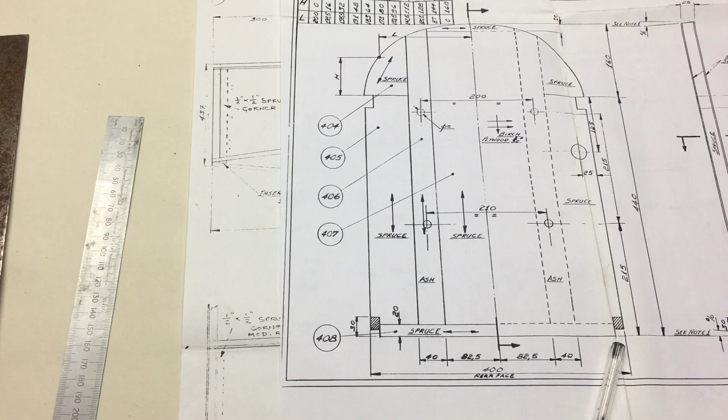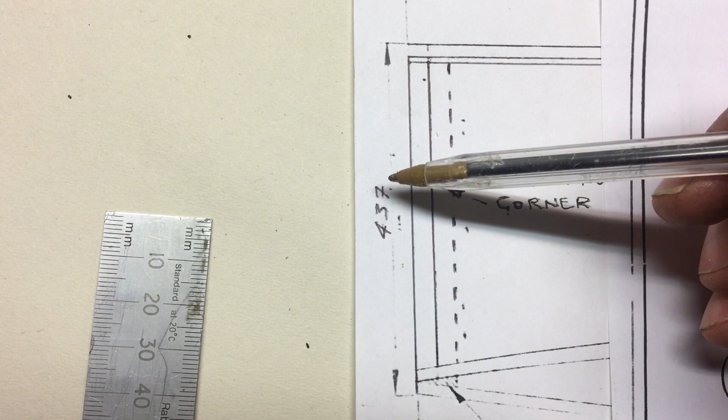I'm just keen to capture this. I had to do a bit of inference here to try and make sense of the plans because of fading, which may or may not be due to poor reproduction or me not keeping the plans well. The number I was having a problem with was barely legible, although it looked like 437.

This is the point where the top of the longeron, it's the depth between the top of the top longeron and the bottom of the bottom longeron. So let's assume that number wasn't actually available.

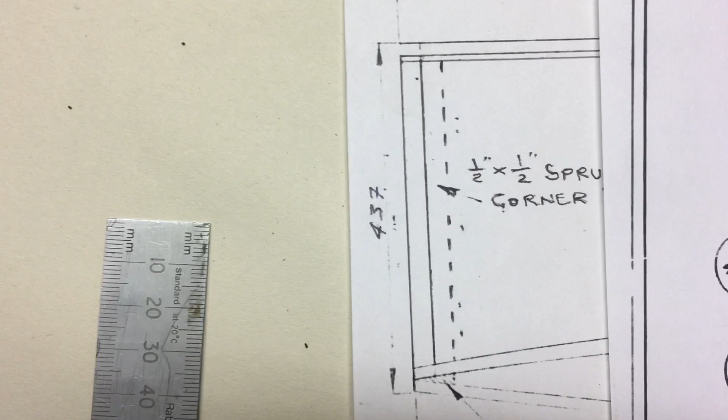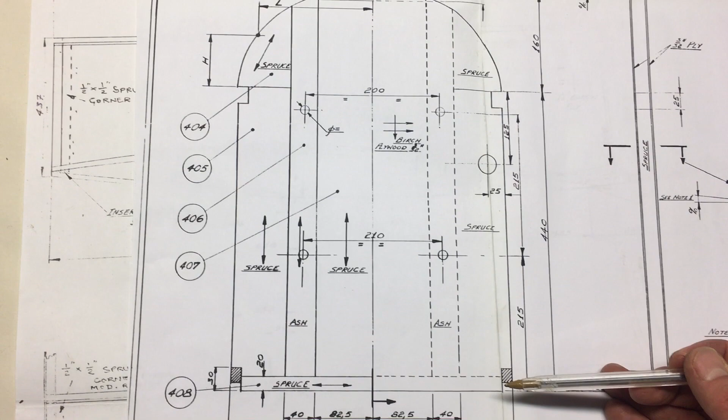That block there is basically the firewall behind the engine, which is this part here. The top of the top longeron sits in there, and the bottom of the bottom longeron sits there, and the distance between them is, according to this, 440 mil.

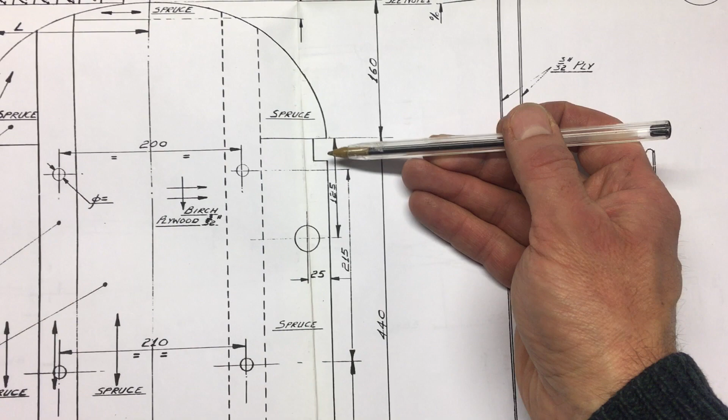If you look from the side at the top, you've got 25, because this is made up of a 15 by 15 plus a 10, plus 15 by 15 plus a 10 by 15 - 25, and that corresponds to what's cut into the bulkhead I have.

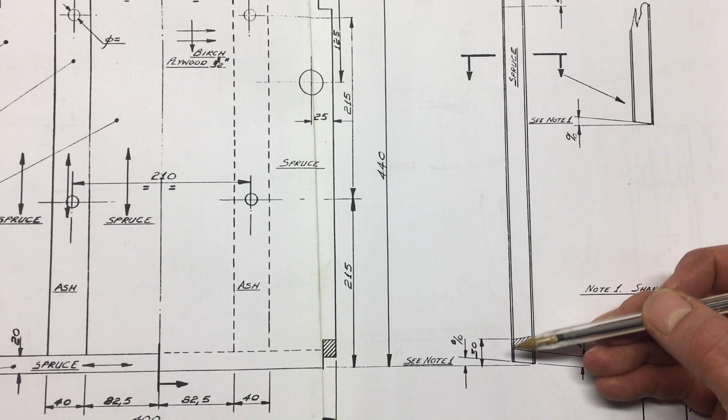Now if you come down to the bottom, so 440, where do you get your 437 from? What you can see is the 440 comes to the bottom of the firewall there, but because the bottom longeron is kind of climbing up towards the firewall, there is a subtle shortening of this length.

And that is the 3 mil, I think, that gets you to what I think is 437 millimeters for the front there.

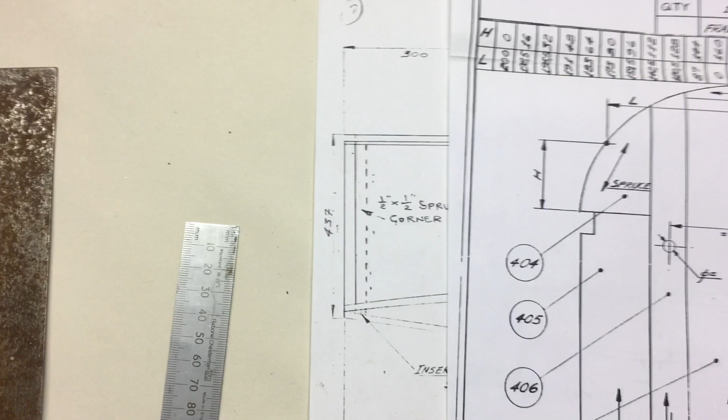And I suppose there's a really straightforward way of working out what that really needs to be. Let me just get past the assorted junk - this isn't junk, this is nicely made stuff, not by me.

Here is the firewall. So let's have a look at it. So there we are, that's what I'm talking about. Sorry for the finger in the way.

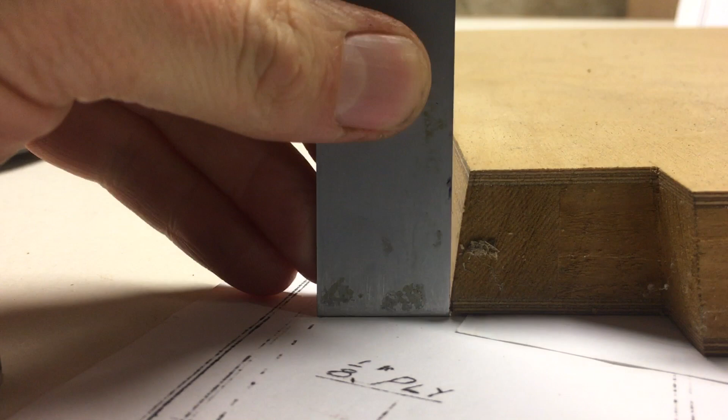That's the difference. Now, is that 3 millimeters? Let's have a look. Is that 3 millimeters? I think it is.

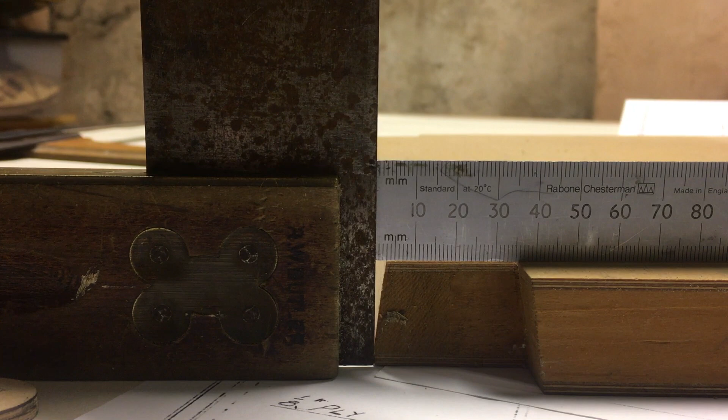There we go, you can see daylight and then it disappears - 3 millimeters. And down the bottom there, it's butted up nicely.

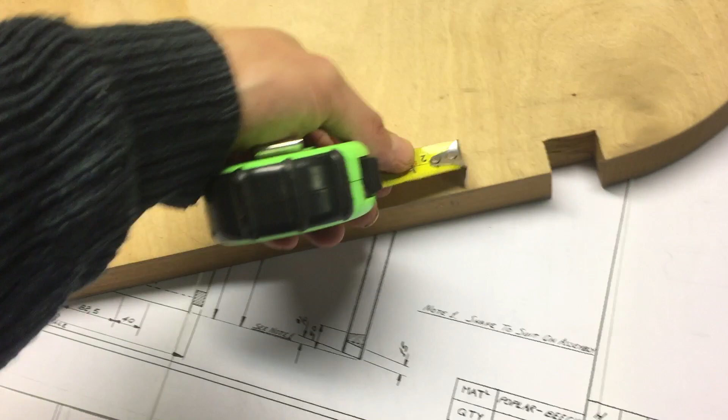Wow, that's helpful. Right, let's just double check that, if Malcolm, who sold me this kit - I can probably say his first name without destroying his privacy - got it right, which I'm sure he did.

We should be looking, so I'm going to do this - if I stick my tape up against the top there, what have we got there? Well, as near as damn it, I reckon 437 millimeters if I position my...

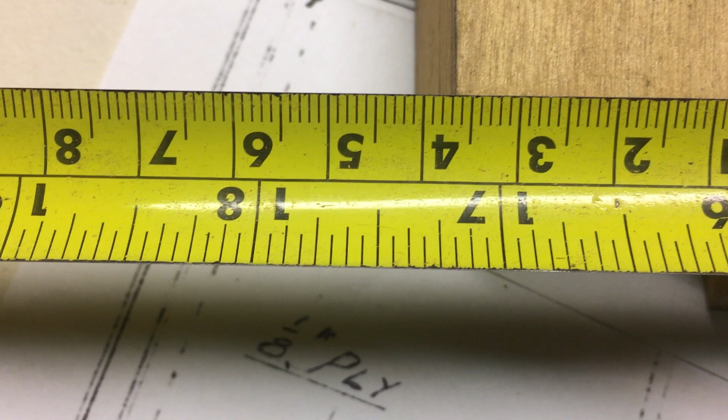Towards the bottom, that's where - where am I? There, okay, so that's 436, but if one was being imaginative, I think you could say that was 437 if I put it down against there. Okay, so 437 it is.

I'm going with that. Fine, brilliant. That means I can actually crack on with laying this out, continue to lay this out.

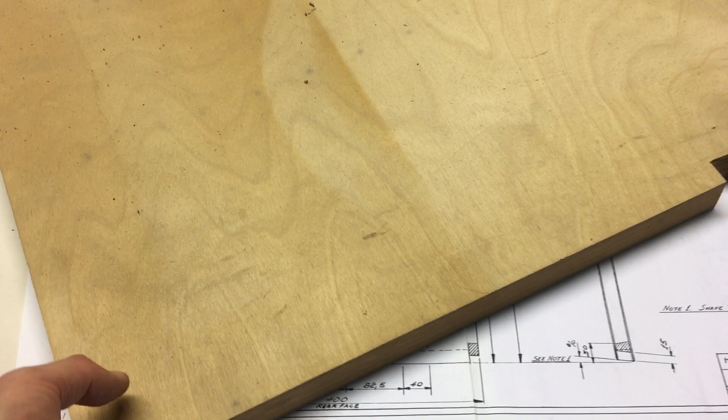It was a problem because I just couldn't - I couldn't - if I can gesticulate in front of the camera, give a bit of emphasis - I couldn't continue to work my way along the fuselage.

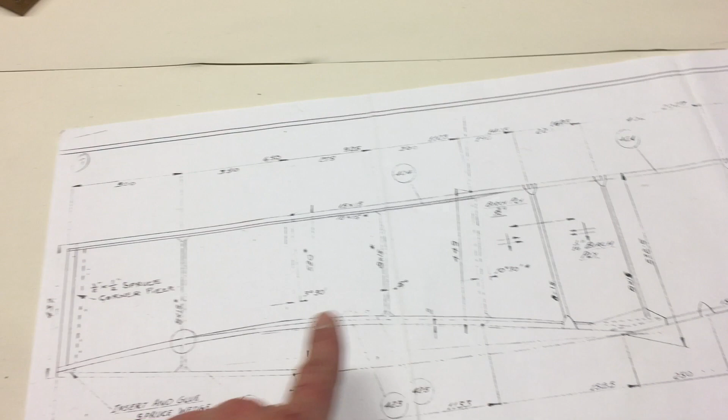If I couldn't pin that number down, that one there, it was stopping me from starting at this end and moving backwards across this tricky bit, because I'm not quite sure exactly how I'm going to plot this up, but I'm sure I'll work it out one way or another.

Right, that'll do for now. Okay, that was long, 5 minutes, crikey. Okay, I'll stop that. A few issues with the lofting process, really.

Just trying to make sure I've got a right angle, really, because I established last time that this build table is not parallel to that build table. It's neither parallel nor co-axial, although it is coplanar, I suppose.

At least in this sense it skews across slightly, so I can't rely on the table edge as I was doing over there to give me my right angles. So I'm having to kind of do it.

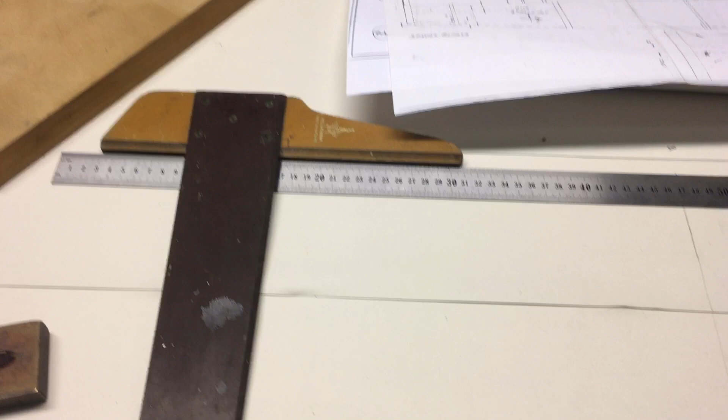I feel like I'm floating in space a little bit, but I've worked out that I can use these drawing tools initially to drop down points - for example we've got 437 here, we established that.

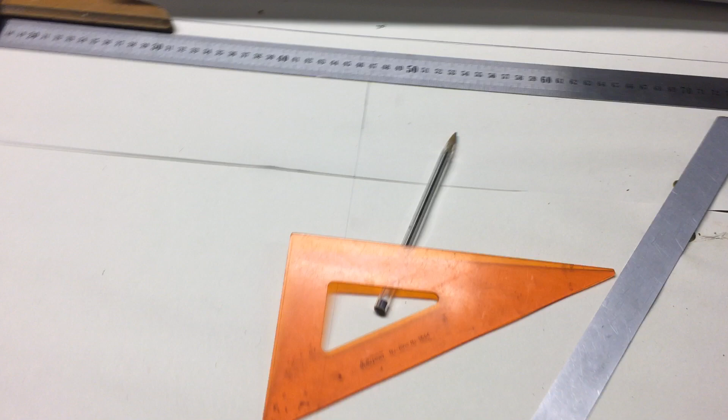So then I'm dropping down points, 437, according to a right angle given to me by that set square, which is quite small, against the top of the fuselage, and with enough points you can start to build up a picture of how accurate you're being, through a process of iteration, really zero in on a good accurate position.

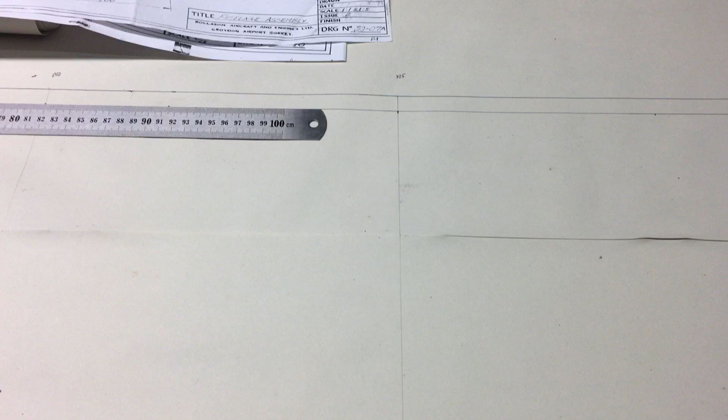Didn't really explain that very well. I suppose if you're way out here, then you try again, and you'll find this is probably going to be better, and you'll realise you're way out here, and you can correct for that. Then with another point, assuming you're still making best endeavours to be at right angles, you should start to find you're getting a good impression of whether you're on target, on the mark, or not.

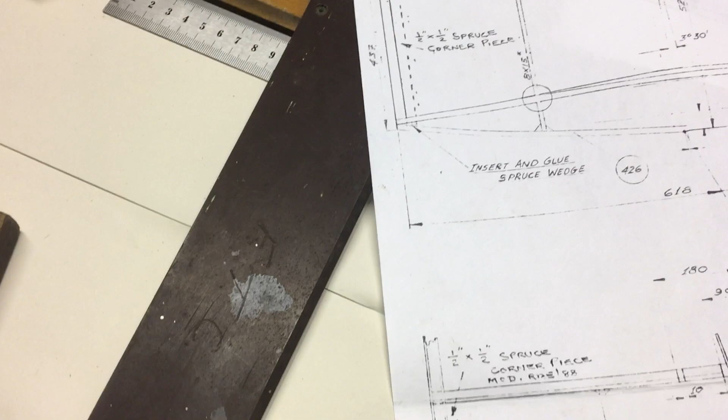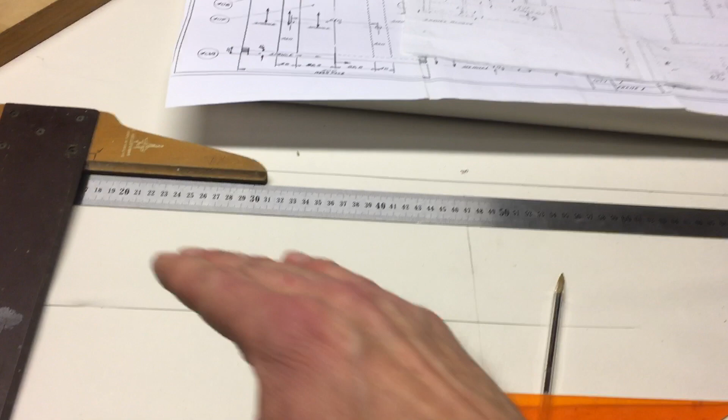So I've been trying to get this bulkhead line accurate. I want it to be an accurate right angle against the top of the fuselage side - well, not exactly the top as such. I think I've done it. I've laid out my long rule against the top of the fuselage side, which is giving me good registration, and then positioned this long square against it.

I've just moved it now - what an idiot. If I move that and try to get it back, this is all going to go horribly wrong. I'll try and keep this right. So I'm trying to position that square on there, and then everything's moved. So my little demonstration is now no good.

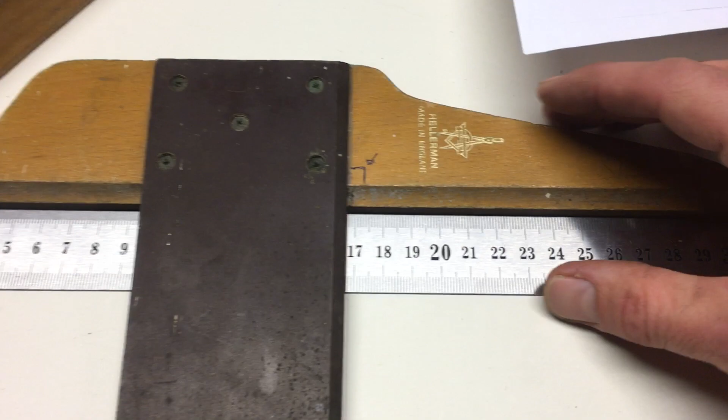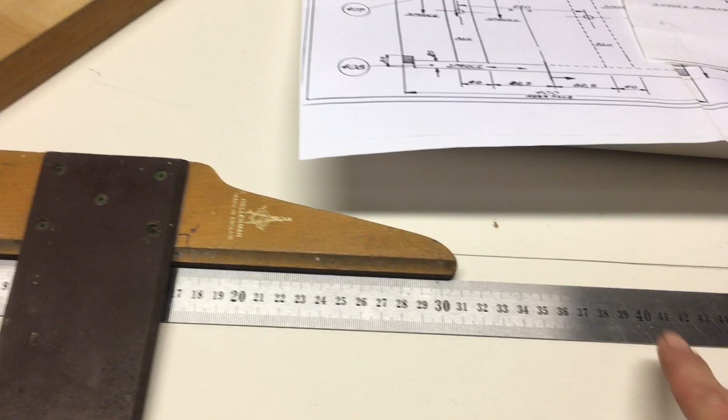So I'm getting that accurately positioned there. I've got this long rule positioned properly, and then if I sight along here, that's the line - you probably can't see, but I think there's an even space between that and the long square. So to me that says this is a very, very close approximation to being parallel with the top of the fuselage side.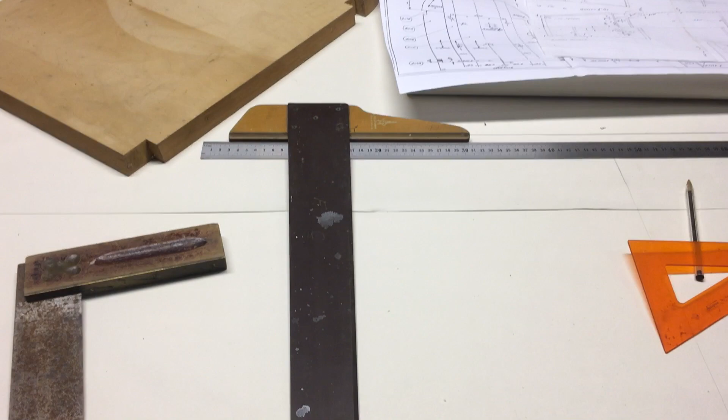This has got a nice long section at the top - there's what's the technical term for the right-angly bit of a set square? So I'm comfortable that this is well positioned against this, and then assuming this square is accurate, the other long side of the square is looking good against my firewall position. So I reckon that's getting me a good position there.

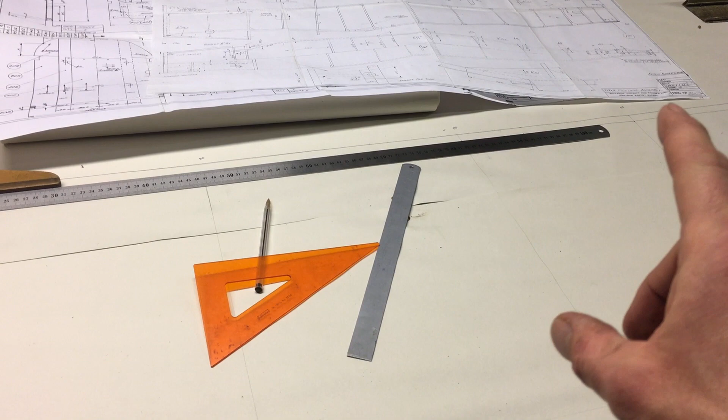There would be another way to check it, which I'm going to have to persuade myself to do, which is a bit of trigonometry. We know that's 437, so if we square that, take another suitable length along here, mark it off, square that, add them together, square root, and then measure the bottom to my point out there. We're doing Pythagoras - if we've got a right angle there, we should get something that's a pretty good approximation to the answer we're expecting.

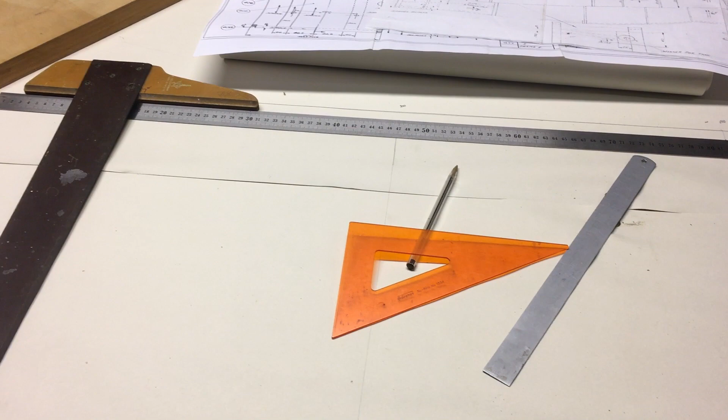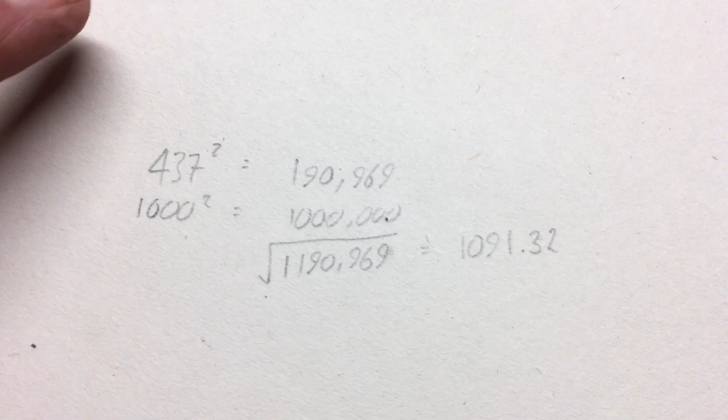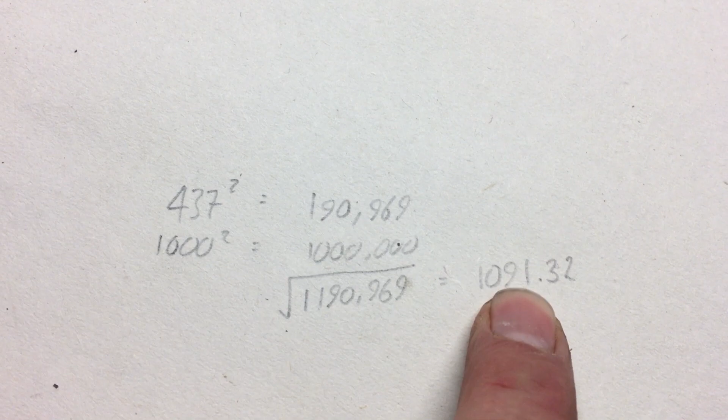Some maths. Right, 437 squared is 190,969. 1,000 squared is a million, of course. 1,190,969 square root is 1091.32. And so that...

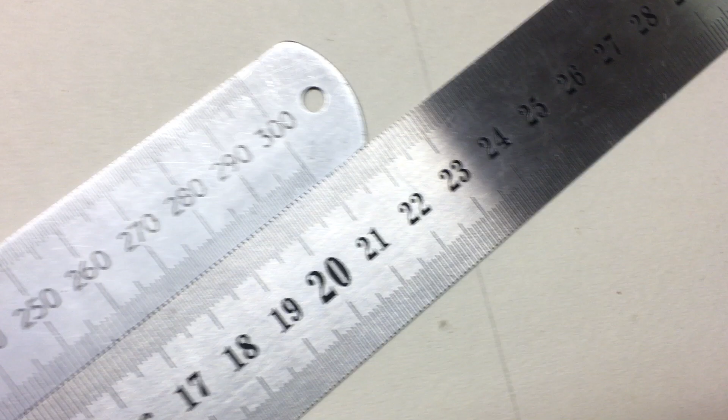Distance 437, I measured out 1,000 for my meter, so I'm just going to position that. That's pretty much bang on. And then here's my sort of improvised setup - so that's right on that point there. I reckon that is 1091.3. So that makes me feel good.

I think that means that this is perpendicular to that, so I'm comfortable that I can use it to project down from the front end of the aircraft. This might be overkill, but it's always worth getting things right because you're going to get enough things wrong. Alright, that'll be that for now. I reckon I'm going to post this, and I'll see you on the next one.

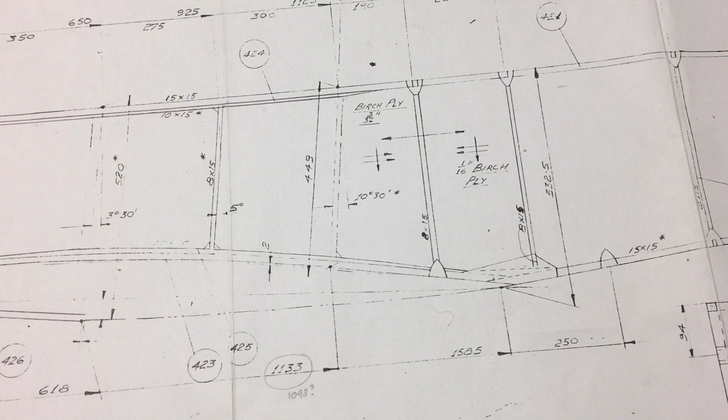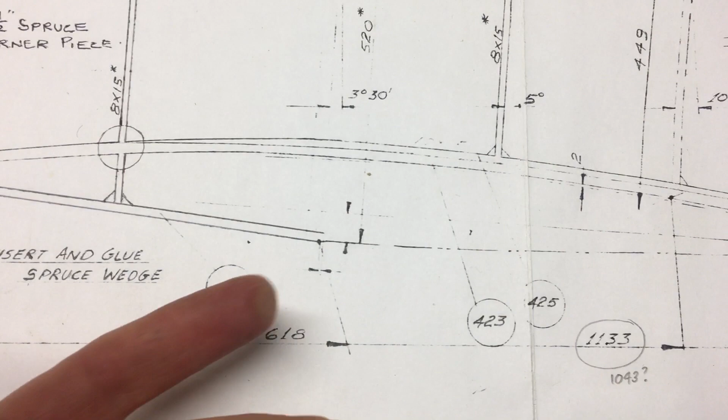Okay, last one, I promise. Struggling as I am with the fact the plans are so faded - for example, that measurement there, you can see there's clearly some kind of dimension there, but I can't see anything relating to that on the plans.

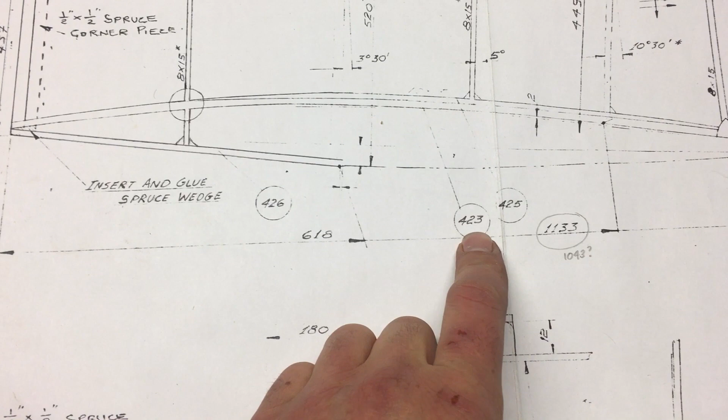I'm also struggling to find what these assembly numbers really correspond to. I can see that they're naming those parts, but I can't find them elsewhere on the plans. But I think that will probably become clear. I had this figure here, which is supposed to be the measurement from the nose to this point, where this part - which I think is the seat back - comes down. But I'm not sure if I filled this number in.

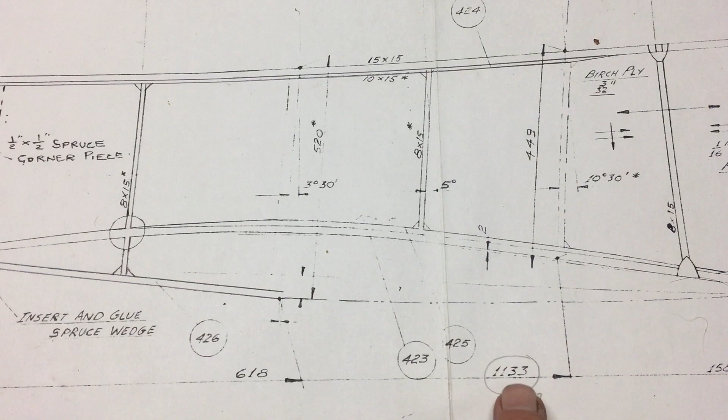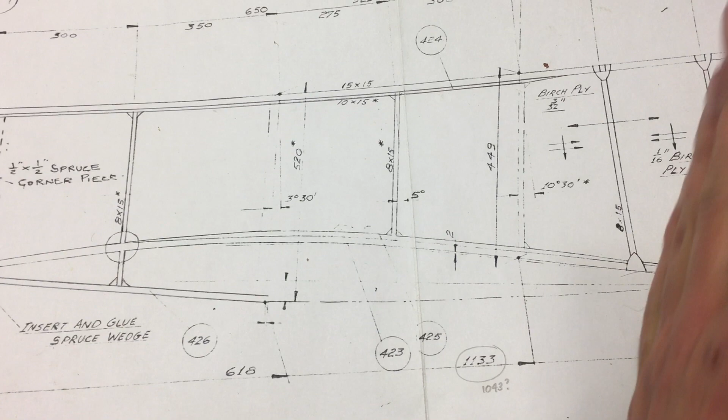The camera makes it look curved, but the top and bottom are both referencing the same datum at the front. If the top of this starts at 1125, it can't slope forward at 10 degrees 30 minutes, or 10.5 degrees essentially, and the bottom can't be further away from the nose than the top, can it?

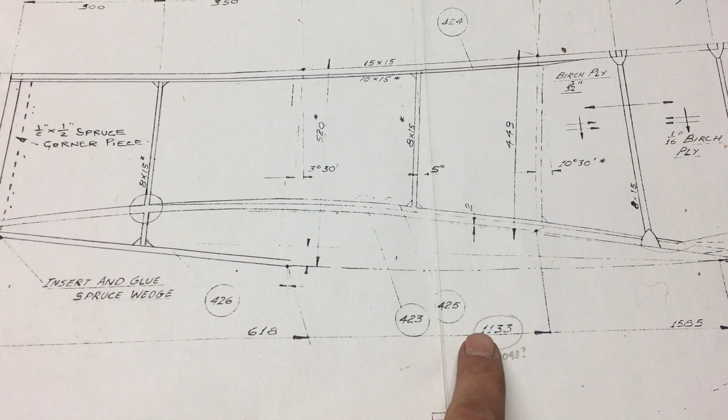I'm not sure whether I filled this number in incorrectly. It looks like... oh, I wonder, 1125, 1133. Oh, you know what? I wonder if that's it.

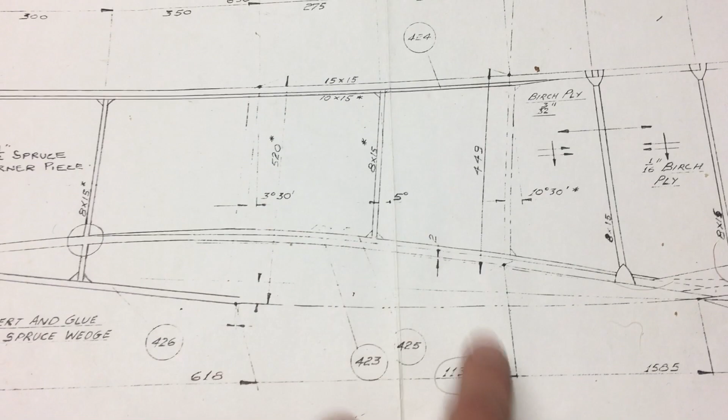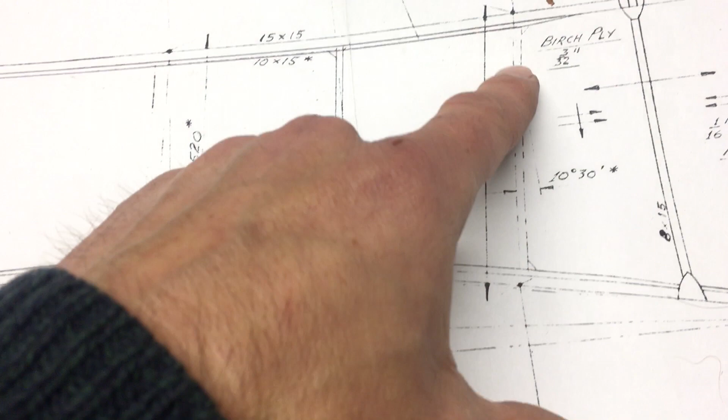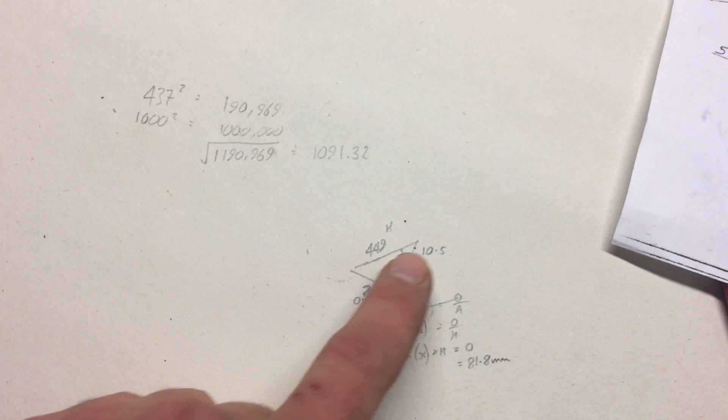So what's happened, I did a bit of trigonometry. I know this length because it's marked, and I can see they've got a line projection from there to there. So that's the length from here to here, 449, and the angle on this part is supposed to be 10 degrees and 30 minutes of arc. So a bit of maths says that if that's 449, 10.5 at the top, then our opposite should be 81.8.

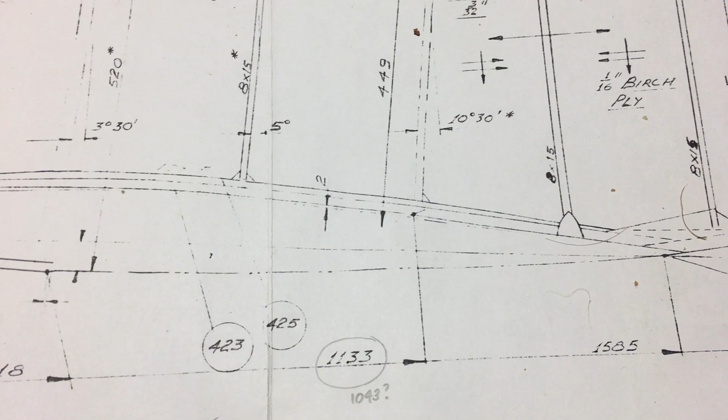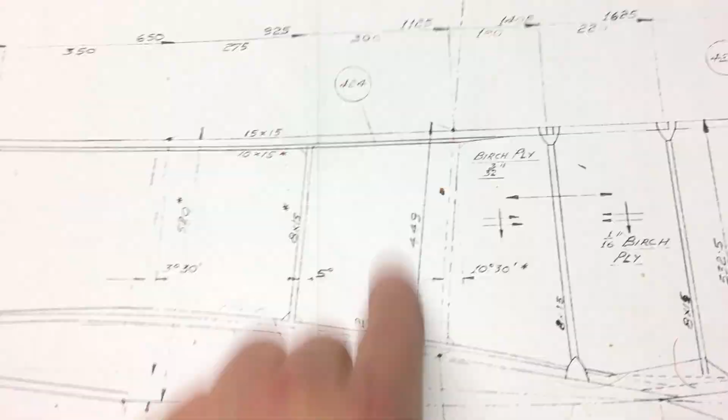Now here it is. So yeah, if that is 1125, this should be 1043. But being a bit... 1125 to 1133 is 8 millimeters, and the reduction is, near as damn it, 80 millimeters.

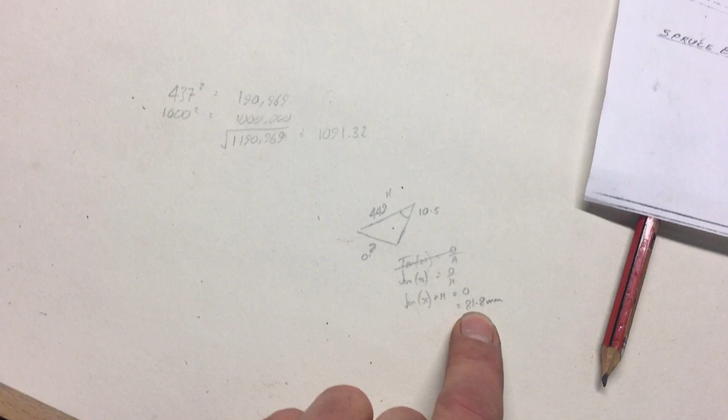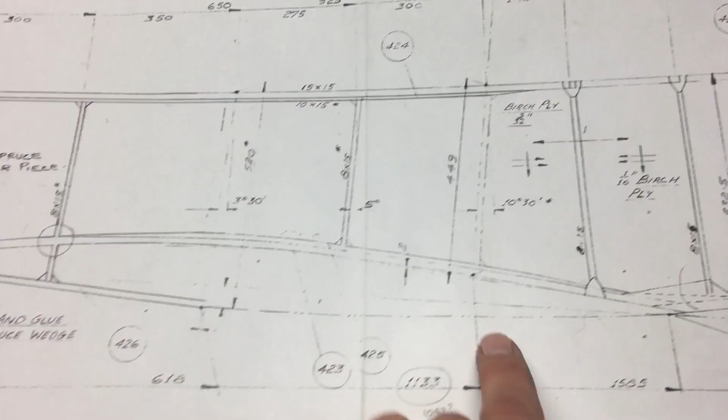Could it be that the person who drew the plans didn't cock up the maths, but got it out by a factor of 10 and added it rather than subtracting it? Because you're subtracting that 8 millimeters rather than adding it, so you go down rather than up, as they've done here.

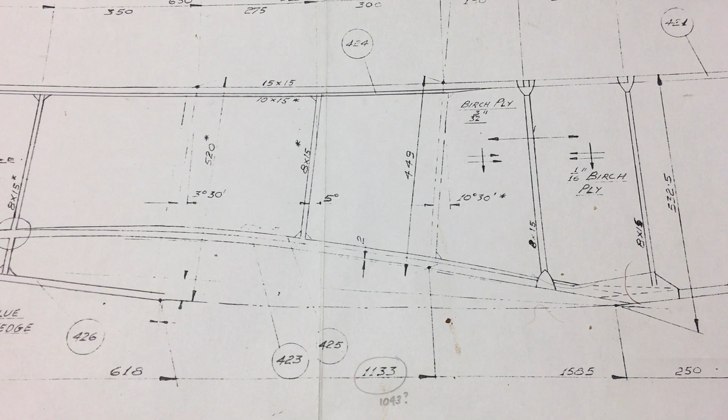Now I'm starting to doubt myself whether this is really 81.8 or whether it is 8.1. But 10 degrees of slope is a fair amount over 449 mil. God, it's not 4 minutes again. Christ, okay, I better stop. Hold on, I'll stop and go back and have another look at what I've done.

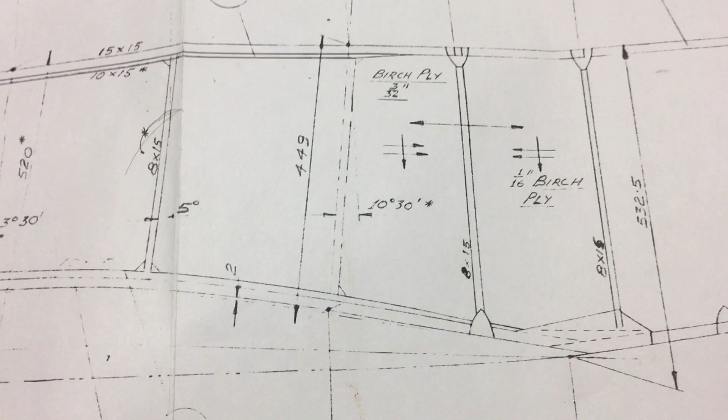I'm not sure whether I've managed to explain what happened, but something's come unstuck somewhere. So what I've done is I worked out what I thought the distance between a vertical projected from here across to here should be, which is 81.8 mil.

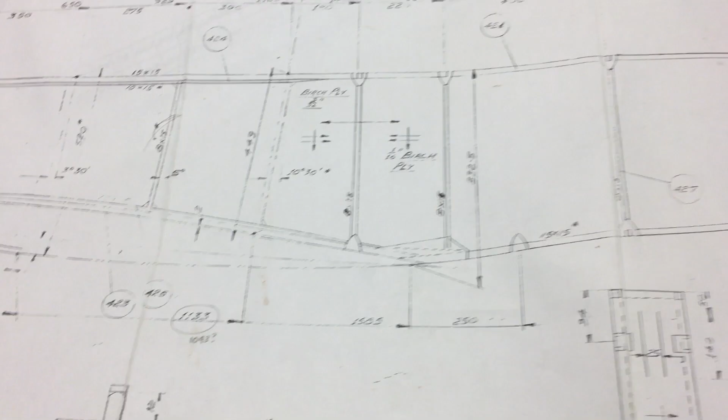Using trig, I know what this length should be, so I set up my long rule, 449 mil, found the right spot, the right distance from the front of the aircraft, 1043 mils. And then if you look at my crappy set square that's not really up to the job, that is 10.5 degrees, 10 degrees 30 minutes off vertical.

So this is hard, harder than I was expecting. Focus. This is harder than I was hoping it would be, but I think that's okay. I think I'm happy with that.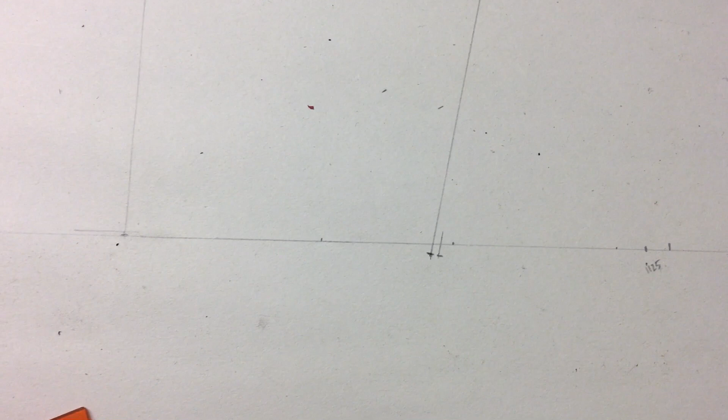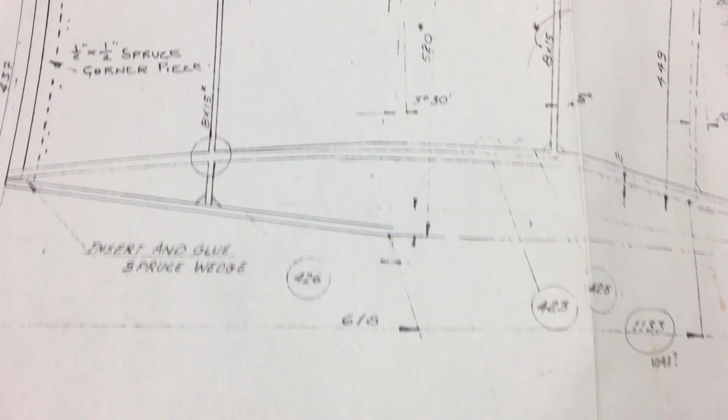That location corresponds to a very hard to see location on the plans. I think I'm going to have to give engineering a call at the LAA and see if I can get them to reproduce maybe this part of the plans, because it's just so faded. I mean, that there, it's gone. I think I know what it is - this is 15 by 15, and that to me I think is 10 by 15, but it's just gone.

Whether it's my fault or whether the plans were pretty ropey to start with - if you look at some of the reproduction, like this page, down here you've lost huge amounts, and up the top here, I don't know how they were reproduced, but you've lost quite a lot of information. Fortunately, you can work it out from looking up the part - 140, you've still got that, fortunately. So in that instance, you can look up the part.

But I'm finding that I'm having to do quite a lot of - it's not guesswork, it's more just triangulation really, to try to get back to a result. 2 minutes, 2.5 minutes, God, shut up Will. But it's frustrating, it's a headache - actually genuinely gives me a headache.

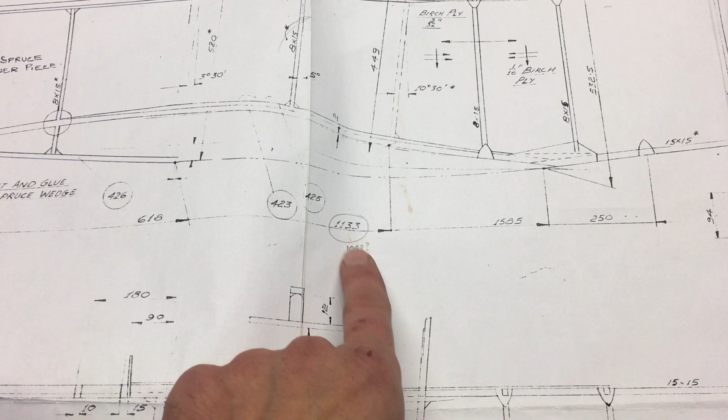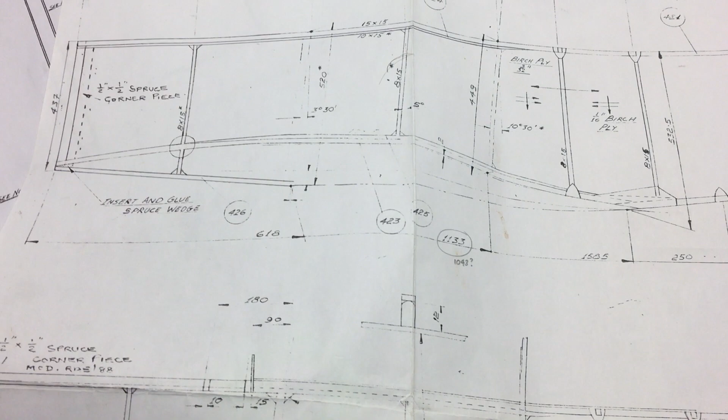Who knows? I'm going to have to speak to engineering and see if I can work out what it is. So I'm going to have to pencil this stuff in, which is frustrating because it's difficult enough to progress as it is without having to wrestle with not really understanding what's going on here.